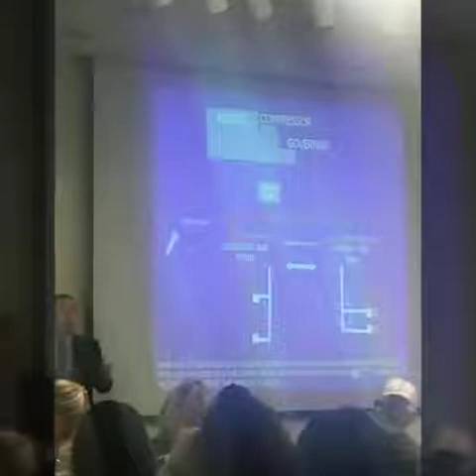No. All right, so when it comes down to it, it's all or nothing here, but this is only applying the rear, right? So if you pull it, the bus is going to come more than likely to a smooth stop, unless you're going really, really slow, unless it's raining. If it rains and you pull it, your wheels are going to lock. Be very careful with using a parking brake ever to slow the vehicle down.

The only reason why I would use the parking brake to slow down is because I don't want my front brakes to brake. And why would I not want my front brakes to brake in an emergency situation? How about I get a flat tire in the front and I'm going 55 miles an hour on a rural road that's just wide enough for the bus, with nothing but dirt and gravel, and a little bit of water on the other side that we use for farming.

So if I step on the brake and I have a flat tire, more than likely when I brake, the bus is going to pull in that direction. So I have to have the intelligence, the know-how, and the understanding of what I'm going to do under this situation. Now, if I brake lightly, nothing's going to happen.

You're going to be able to slow the vehicle down or just come off of the accelerator. Don't even use the brake. But I'm coming to a stop sign. The tire blows. There's a horse crossing right in front of me in about 200 feet. I need to slow down and stop, or at least slow the vehicle down.

How do I brake without affecting the front of the vehicle to the left or to the right? That would be pulling the parking brake, pushing it in. Pulling the parking brake, get some braking power, push it in. Pull the parking brake, push it in. Controlled braking through modulation with the parking brake.

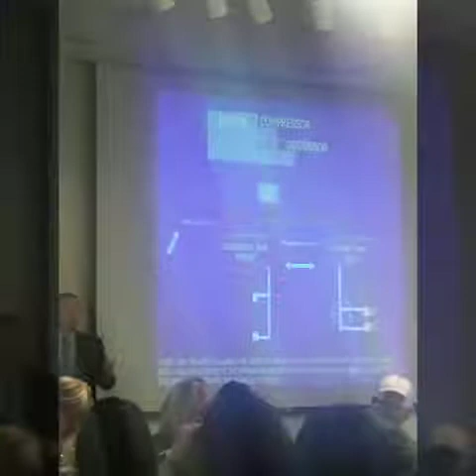Isn't that kind of easy? That's kind of cool, right? Because I don't have to do anything, all right? A monkey can drive the bus, pull the air out, and the bus stops by itself, right? Not to say that anybody here is a monkey, but if you were, you wouldn't have to do anything. It does it by itself. It's really, really easy, all right?

So a separate emergency tank would be used to release the brake and allow the driver to move the vehicle to a safe location. You can still do that with a 121 system, a dual air brake system. Have a separate tank, because once you lose air in the front and the rear tanks, it's going to automatically actuate just like this right here. And what will happen is that you can't move the bus anymore. And you're in the middle of a road, 55 miles an hour, logging trucks, cattle trucks, pig trucks, hay trucks, I don't care. They're coming right behind you and the bus is stuck in the middle of the road.

Nothing you can do unless we cage the springs or somehow patch the air leak, at least have one tank, and then we would be able to push in the parking brake and move the vehicle forward. Well, these systems had a separate tank, separate from the service brake system, which would allow you to push in that valve. Notice that it's not yellow, all right? It's a black valve, or it was a green valve. I've never seen the reds, but I've seen greens and blacks. So you were required to push in the valve, but keep pushing it in. If you did not add force to it, it would automatically stop again.

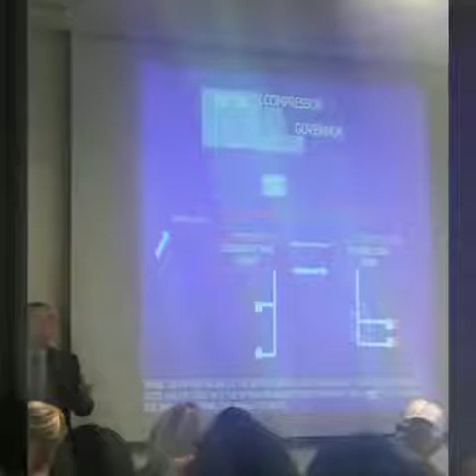All right? So this automatic actuation does not exist on this modulated system. It requires that you use your hand to stop the bus. Bad idea. Because back in those days, there were no training requirements for school bus drivers. You did not have to go through that really boring class. You did not have to get tested by that really mean CHP officer in the back that looks at you funny when you're tested. I don't think he likes me.

He doesn't even know you. He doesn't care what's going on. All he cares is that he sees what he's dreamed of seeing his whole life, and that is a professional school bus driver every single time he tests or she tests. Right? That's all they want. That's it. But no, what's the big deal, man? I mean, it's like, so I missed the cut in and the cut out, right? What's the big deal about that?

What's the big deal about the static test? Who cares if it's 3, 4, 5, 7, 10? Who cares? It doesn't matter, right? What matters? It matters. It's called safety, right? And why would you want to put yourself in a 26,000-pound vehicle without brakes? What is wrong with you? You are suicidal, all right? You're crazy, right? He's not failing you because you don't know what to do. It's because you're crazy.

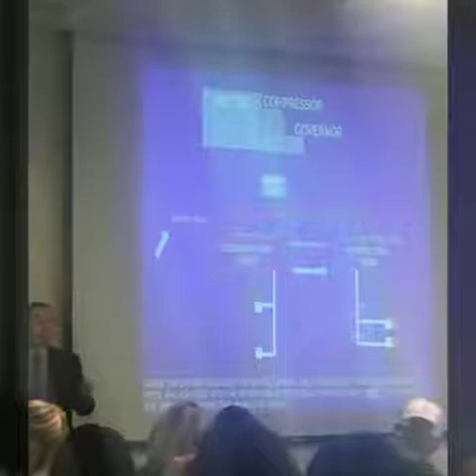All right, so anybody hear of the Martinez accident up in Northern California? Yes. The reason why you have to do all this boring stuff in the morning, you heard it in the morning, you hear it every time you get to the yard, right? It's like if you're Mexican, you know what the zapateado is. Yeah. All right, I like those drivers because I know they can dance, right? I want to dance with you. Why are you doing that? I want to know who would beat up someone for fun or something, because that's exactly what you're doing.

You are beating up a diaphragm, all right? Think about that. If you are pounding on a diaphragm, what do you think can happen? It won't break, right? It's going to leak and it won't break. Why are you laughing? What's so funny? You're pounding on a diaphragm. Eventually, this metal part, it's a hand, right, that's hitting the diaphragm. You're causing friction. And what happens when you cause friction? Eventually, that diaphragm made out of rubber will break. And when it breaks, you're going to leak. And when you leak, that's a bad thing, especially if you don't check your brakes correctly. So do not pound on the diaphragm. It's a bad thing. All right? Make sense? No good.

All right? For those of you that don't have rhythm, I want to party with that driver too. You got rhythm. Yeah, I like it, right? Take your time. Stop being so aggressive. Relax.

There is a specific color. This color is what color? I'm colorblind. What is it? Yellow. Yellow? All right, so it looks gray to me. But yellow means what? Caution. Go faster. Who said that? Yellow means go faster. Stop it. No, it means caution. Hey, slow down. Precautionary speed. Not illegal speed until you violate the basic speed law. Going too fast for the conditions of the road or the weather, all that good stuff.

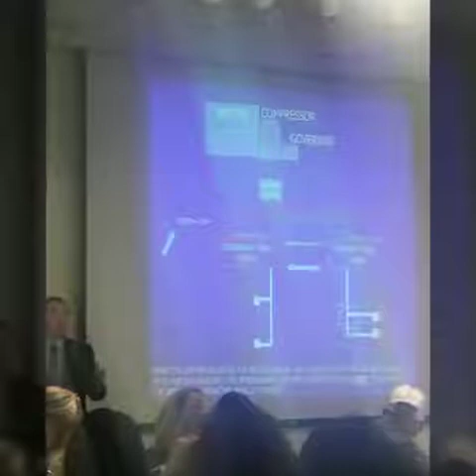When you get a speeding ticket, that's the ticket that you're going to get because it's a catch-all ticket, right? You had an accident. It was raining. You were going too fast. No way. I was going 20 miles an hour. So how'd you just get out of control and hit that car? I don't know, but I was going 20 miles an hour. Good for you. You were going too fast, right? You violated the basic speed law. So it's easy to catch you on that. So obviously, if you have an accident and you're going faster than what's recommended because of the curvature, then more than likely you're going to be at fault by violating that basic speed law. All right? So 20 miles an hour.

The bus hits the rail, mounts the rail, rides the rail, and then succumbs to the centrifugal force, ends up falling down on its roof. And when it falls on its roof, I want you to think about that bus. It was a very old bus. It had low back seats. Just like this right here, what you're sitting on is a low back seat, okay?

I want you to think about the high school kids that were sitting in that seat. The roof is on the top portion of the low back seat. So you want to know why some of these kids passed away with this accident? It was because the roof caved in, and it caved into the seat, and the only portion where the kids were actually safe or had a safe space was between the seat and the floor. All right, very small area.

You know what high school kids look like today, right? I'm sure they were pretty similar back in those days, although there weren't that many McDonald's back then, so I don't know. But I think we've kept our sizes pretty equal our whole time. Although I heard a story this week that our kids are taller, skinnier, but less strong for some reason. And it might be because of Fortnite. You know what Fortnite is? Well, there's a lot of people laughing in here, so you do know what Fortnite is. Yeah. Your fingers are bigger because they need to get to the buttons, right? So I don't know. It's weird. We're supposed to have, in 20 years, a bigger head, bigger eyes, and we're going to turn green or something. That's what they were talking about.

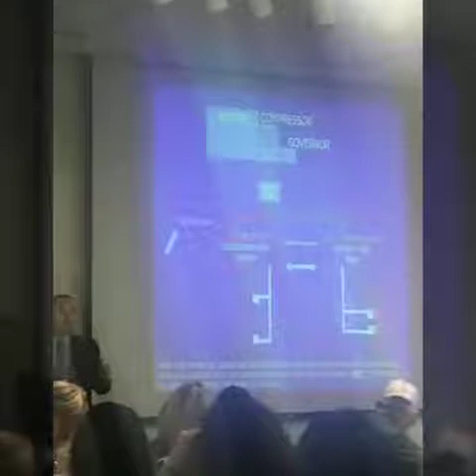But needless to say, what happened here is that back in those days, our buses weren't as strong as they are today. Now our buses have rollover bars. You don't get to see them unless you take a bus apart. But the rollover bars are on top of it. They have very strong steel braces on the side to hold the integrity of the roof.

And hopefully, who knows? If we drop a bus more than 20 to 30 feet, maybe it'll cave in, but it might not cave in completely because we have all those rollover bars as well as braces throughout the whole top of the bus. So it's supposed to bring the bus over to its side if it ever rolls over. That's the design of that bus. We don't want the bus on the roof. We want it on its side. So just to show you what that bus looks like, right now, those kids are actually sitting somewhere in here.

Now, the biggest problem is that the emergency responders have never had this situation happen before, ever, anywhere in history. So, fire department, CHP, local law enforcement, you had everybody there trying to help out, but they couldn't get these kids out. They started making holes all over the bus to find the kids. Anybody know what that used to be, that hole that's right there? They call it a boot, because that was a section where we actually put our luggage and our freight and anything that we were transporting. It was in the back of the bus. So they're making holes everywhere they can to get to the students.

And as you all know, if you've had a class on how time matters when it comes down to saving someone's life, minutes and hours pass, and some of these kids succumb to their injuries because we couldn't get to them fast enough. All right? So all kinds of things were learned from this accident. The first thing, the driver was not required to be trained on the air brake system. The driver was not required to understand or be proficient in the vehicle before they drive the vehicle unsupervised.

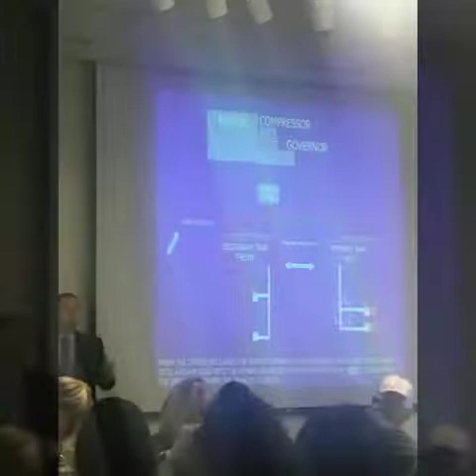So this vehicle had a modulated system. A modulated system, meaning when your service brake goes away, the driver has to use their hand to stop the vehicle, right? Whether it's on the dash, this one happened to be on the steering column, that he had to pull to stop the vehicle. So, it has a leak in the system. The driver is told that the bus leaks oil. So eventually there's going to be a light buzzer that's going to go off. And when it goes off, all you have to do is pull over, go to the boot, and get those gallons of oil that we left in the boot.

Now that's hazardous materials, right? How often do you get to carry those on a school bus? Well, that's right, that's illegal, right? Well, not then. Heck, you can bring fuel, oil. Hey, we can have an oil party for all I care in a school bus. It was completely legal, but because it had such a bad oil leak, guess what? All you have to do is put some oil in it, and then that bus is going to go.

The driver's driving down the roadway, stepping on the brake, there's traffic, all of a sudden you're using too much air and it has a leak, and then the light and buzzer go off, right? When it goes off, what's the driver thinking? Oil leak, right? Pull the bus over to a safe location, put some oil in it, leaves the bus running with kids on the bus. Bus running, kids on the bus, right? No longer using the service brake.

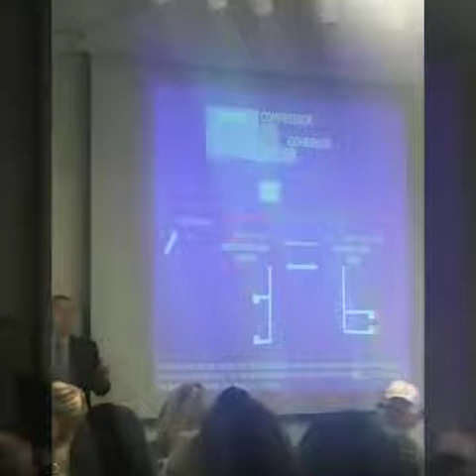So now the leak is not overpowering the braking, so it has time to build up, so the low air warning device no longer stays on as the pressure goes back up. This is a single air system. This is a system that had to have the low air warning device come on no lower than 55, actually between 75 and 55 PSI, if you remember that. So it came on, but if the driver leaves the bus running with the kids on the bus, eventually it's going to go over 75 PSI and no warning device is going to be on anymore.

Puts the oil in, keeps driving, starts getting closer to Martinez, boom! Once again, the low air warning device comes on, but he's thinking it's the low oil pressure warning device. You know what that is? When you turn the key in the on position and you have a buzzer go off, that's exactly what that is. If you turn the key and it doesn't go off, something's wrong with your bus. You have no low oil pressure warning device. It might be very subtle, but pay attention to it.

When you start the bus and you have compression in the engine, right? It's going to go off and the light's going to go off. It's going to be pretty quick, right? But if you lose engine pressure or oil pressure, that warning device is supposed to come on. Sometimes it's the same sound as your low air warning device. So be very careful with that depending on how old your bus is.

So the driver loses the air, doesn't pull over, he's almost there, continues to lose air. And as you start reducing the volume of air in the single system, you start losing the capability. Remember I said 100 PSI? Don't move the bus unless you have 100 PSI. What do you think is going to happen if you're at 50 PSI? You think everything's going to work the way it's supposed to? Probably not, right? You don't have enough air.

Have you ever been pulled over for a DUI and had to blow into that little thing? No way. Why'd you look away? Oh, don't look at me. Oh, that was a long time ago. No, that was my sister. It wasn't me drinking, and it made me blow into the...

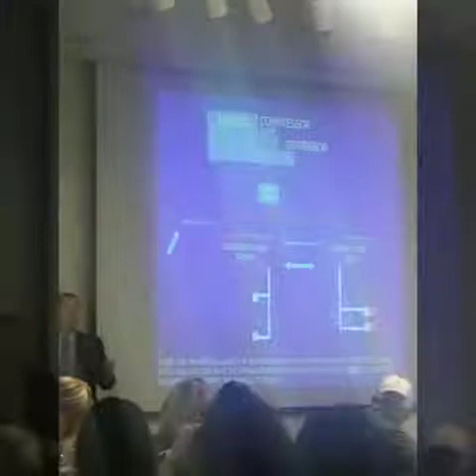No, absolutely not. Now, well, you've gone to do a drug test, and it's an alcohol test too, right? I hate that test. Because blow, keep blowing, keep blowing. Are you kidding me? What do you think my lungs are? I don't have balloons for lungs. I can't blow that long, right? So when it comes down to it, if you don't have enough power or air in the system, you're not going to be able to pass that test. You're not going to be able to move those mechanical parts, right?

So he steps on the brake, the bus does not stop. This is a standard transmission. He's going over about 55 miles an hour. Now, if you've ever driven a bus with a standard transmission, it has a clutch brake. Anybody know what a clutch brake is? Yeah, so it stops a set of gears from moving so that I can put it into gear, especially on an unsynchronized transmission. So this driver could have downshifted this bus to slow the vehicle down. From fifth to fourth, slows the vehicle down, fourth to third, slows the vehicle down, third to second, and now we should be able to traverse this curve without a problem.

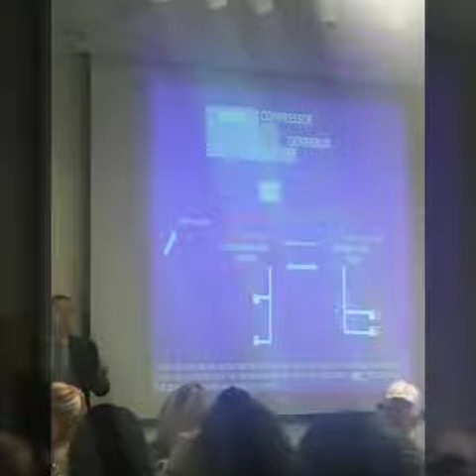He was never trained on double clutching, using the clutch brake, or, in a situation where the bus doesn't stop, using the transmission to slow you down. At least a little bit slower might have given him control of that vehicle. So he steps on the brake. The bus does not stop, steps on the brake again, the bus does not stop, he doesn't understand what's going on. He has a full tank on the emergency stopping system, and all he has to do is pull the lever to stop the bus. Doesn't know, not required to know. Doesn't know, not required to know.

The reason why you're so safe in the state of California is because you are required to know. And you are required to know everything about that bus, power and gradability, brake system, other secondary braking systems like the retarders. You're required to know about the wheelchair lifts and how to tie down. Everything on that bus you must be proficient on before you can drive that vehicle unsupervised out there on the road. Even if you pass the test with CHP, if you're not proficient in the vehicle and how to drive this vehicle, you cannot drive the vehicle alone. Does that make sense? So why does that happen? Because we killed 29 people. Proficiency was required after April 1st, 1977.

SPAB. You ever heard of a SPAB bus? The ones that take you to work, right? When you do an activity trip, the really pretty ones with air conditioning and TVs and really nice fresheners inside.

And they have a bathroom with a massage, right? You hit this button and water flushes upward for some reason. No toilet paper. What do they call it? Bidet or yesterday, something like that. I don't remember what happened yesterday.

But when it comes down to it, SPAB was created. Proficiency was required, Title 13, Section 1229, right? We just heard that in the last class. And last but not least, Federal Motor Vehicle Safety Standard 571-121 was created. That means that you have to have a bus that has a system, a backup system, and an emergency stopping system. So you have a primary system for your rear brakes, a secondary system for your front brakes, and an emergency stopping system in case something happens to one or the other. No matter what happens, what you need to know out of this class is step on the service brake and the bus is going to stop. Got it?

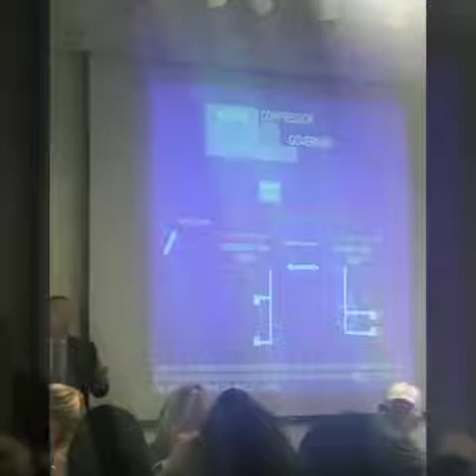That should not be happening with your supply tank. It is not a wet tank. If it is wet, ask your mechanic, do I have an air dryer? If you don't want to ask the mechanic and you want to find out if your bus has an air dryer, wait until the air governor cuts out. And at the end of the air governor cut out, you will hear what? Flatulence. Yes, very good. That is the air dryer exhausting all the gunk and extra stuff out of the system before it sends it somewhere else. So this air dryer is doing that work. If you have an air dryer, you're not going to have a wet tank. Does that make sense?

If you have a wet tank and you have an air dryer, let your mechanic know. Every day at least dump the air out of the supply tank. If you don't do that, you don't know what's going on in your blue system. You got it? If it's leaking, you can see oil, you can see gasoline, you can see coolant in there. You see all those things because things can bleed into your compressor.

Your compressor is hooked up to the engine. 99% of the time it's using the cooling system and the lubrication system, or your oil, to work. So at one point in time, the gaskets go out and they can start bleeding into your air brake system. Where do you find it? In this blue tank right here, the supply tank. Got it? Dump your supply tank. Just air should come out of it. Sometimes a little bit of moisture, but not a whole lot.

If it's gunking and you can see it on the ground, write it up. Something's wrong with my air dryer. Now the mechanic's going to be kind of angry at you because it's like, who do you think you are to tell me that you think it's the air dryer? Well, right. What else would be causing water or gunk getting in there? Obviously, the cartridge inside the air dryer is not doing the work. So it's getting to my tank, right? Bam! What about that? Of course, the mechanic's like, whatever. I'm not going to fix it. I'm just telling you something's wrong with it.

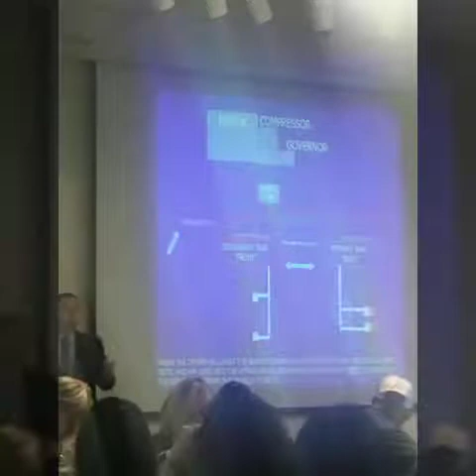All right, the red tank, that's your front axle or your secondary tank. You're going to have the supply tank, the front tank. There's going to be a little valve right there called a safety valve. Anybody know what a safety valve is? What happens to a balloon when you blow into it? Pops, right? What do you think is going to happen to your tank if you don't have a safety valve? It's so it doesn't blow up when your governor doesn't work, because it will fail at one point in time. It will not cut off at no more than 130 psi. It could go all the way up until blow up time. The safety valve is designed so that it will expel the air out of the system at 150 psi.

All right? How do you test it? You've got to stop the governor from working, right? How do you test it? You don't. You see 131 psi, what do you think I'm doing? I'm going to be pulling the bus over to a safe location, doing another brake inspection, calling it in. I need a mechanic. Something's wrong with my air governor. It's cutting out at more than 130 psi, right? 135, 145. Why is it getting that high, right? That's kind of scary. At 150, that valve is supposed to expel.

And it resets. If it does go off one day, for whatever reason, the governor doesn't work, air will exhaust to a safe level, and then it will shut again. So it should work over and over again. And if it doesn't, then the mechanic will change it. Easy fix. All right, same thing with the primary tank. It's the green tank. You're going to have the supply reservoir, so it's supplying to the red and the green. You're going to have a safety valve. You have a drain cock there. You have the low warning device that's set up, more than likely, depending on the type of bus, either in that tank, on the supply tank, or your gauges themselves.

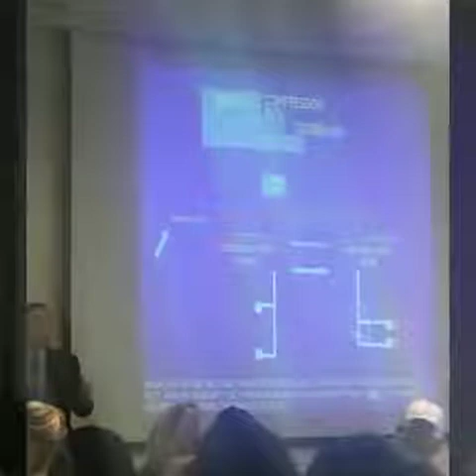Either the valve when I pull the parking brake, or the service brake when I apply it, and a very, very important valve which is called a spring brake control valve. That's exactly what allows that to happen. And of course, your parking brake system has a valve. And what does it say? Parking brake. Does it say emergency stopping system? Emergency brake? Is it red? No.

So don't use it as an emergency brake. Use your service brake. All right, compressors. There's two types of compressors. You're either going to have a gear-driven compressor or a belt-driven compressor. This will be connected to some gears in the engine.

This will be connected to a pulley, and that pulley is connected to like a fan belt, and the fan belt's connected to... isn't that a song? Fan belt connected to... oh, that's another song. But basically, you'll see your compressor, and you'll see a pulley, and you see a valve. That's pretty much how that turns on. The compressor's on at all times when the bus is running. Okay? The compressor's on at all times when the bus is running.

So if your governor fails and it continues to build air, how do you stop the governor? Shut the engine off. Really easy. Turn it off, and it will stop. And you're screaming and yelling, it's gonna blow, it's gonna blow. And it's not gonna blow. You have a safety valve. It's gonna be fine. All right. All right, the governor. What does the governor do?

He passes the child check-mate law, and these things that were supposed to cost $100 now cost $3,000 to install on your bus. Now, not only do I have to do that, but I have to burn calories to go to the back to hit this little button, right? Hit this little button. That's what the governor does, right? No, the governor just signed it. It was the legislature that did that.

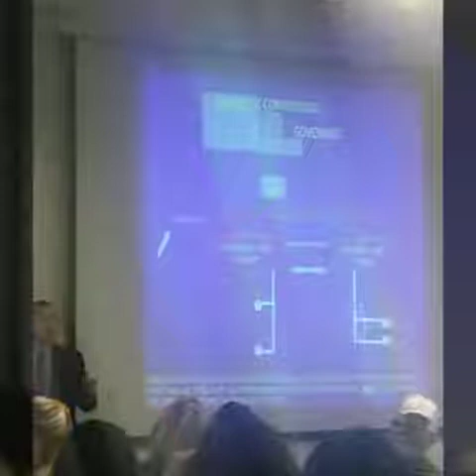So when it comes up to it, it governs something. It turns on, turns off, turns on, turns off. Air conditioning, that has a governor. It's called a thermostat, right? Your cooling system has a thermostat. It's a governor. Cut in, cut out. It turns the fan on or allows water to go from one section of your cooling system to another section so that it maintains a certain temperature to drive the vehicle. Governors are everywhere in your life. It governs or controls the cut in and cut out.

All right? Very simple. It should cut in no lower than 85 psi, and the only way to get to that point is to apply the service brake, all right? Or if you are dumping the air with a valve or push knob, then you can actually touch that knob and dump the air to find out where that governor comes on. It should turn on no lower than 85 psi. 99% of the time, about 100, 102 psi.

Why do you think the governor turns on at 100 psi? Didn't I say that you had to have at least 100 pounds to move the bus? Wouldn't it make sense that a system would know that? Right? So the system's smart. It's like your phone. It knows everything.

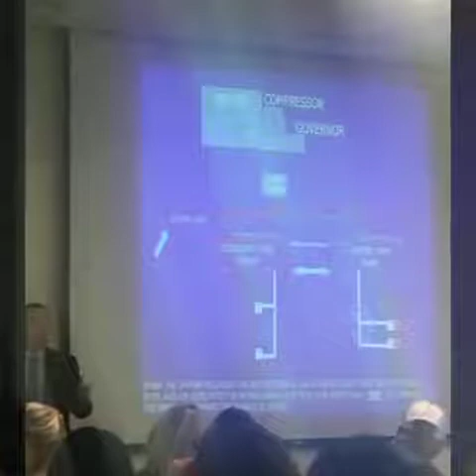Everything that you don't know, you just say, hey, what about this, Google? Bam. Or Cortana, or whatever else. Siri, have you ever said, are you serious? And your iPhone's right next to you? Right? Are you serious? Yes, how can I help you? Shut up, not you. I just can't believe this is happening. It scares the crap out of me at night because the news will say, serious, and she answers, yes, can I help you? I'm like, hey, there's another woman in my bedroom. My wife gets mad at me. It's like, what do you mean? You're talking while you're sleeping. No, I swear. She said, may I help you? And it wasn't you. I get in trouble all the time.

So, governor, it governs, okay? The air dryer is very simple, all right? The air is used from the atmosphere, right? The compressor is using air from the atmosphere, and it is sucking the air from the atmosphere. It's also sucking all the nasty, gunky stuff that's in the air, right? That's killing people, that's giving you cancer, all that good stuff.

All that stuff is going into this air dryer. It is absorbing all that stuff, the moisture and the gunk, so it doesn't go into the brake system, all right? So it removes moisture and contaminants from the entire system. The air dryer's job is to cool, because the air does get warm, because it's a little engine, that compressor's building that air.

It cleans and it dries the air to ensure efficiency in the dual air brake system. Pretty simple. All right? Supply reservoir is in the blue. That is basically taking the air from the blue system, brings it into the center, and it pushes it out to your front and rear tank. All right? So if you're going to drain anything, drain that one. You drain that supply system, it will tell you that something's wrong in the charging system or blue system if there's gunk or liquid coming out of it.

When you come to the rear tank or the front tank, you're going to have a valve called a one-way check valve. Okay, this one-way check valve allows air to go in one direction only. Does that make sense? Have you ever been on a one-way street? What happens if you go the wrong way on a one-way street? You crash, right? Have you ever seen someone getting on the freeway going the wrong way? That's a one-way system, all right? It doesn't work two ways. It only works one way. This is a one-way system.

It allows air to go into the tank, okay? Notice that it has a little spring on the inside. It has a little seal made out of rubber. When you push the air or the governor cuts in, it's pushing the air from the compressor into the system. As soon as the air governor cuts out, the air inside the tank pushes this way as well as the little spring to keep the air in your front and rear tank. Okay? Does that make sense?

How do I know that the one-way check valve is not working? Does anybody know how to check the one-way check valve? Anybody? Okay. Remember I told you that this tank right here supplies the air to the front and the rear, right? Dump the air out of this one. If one gauge moves, and it's the rear gauge, then guess what? Your rear one-way check valve is not working, all right? What happens when your rear one-way check valve doesn't work? Well, air is going to leak out of it, right? You're going to have air leakage.

You'll see it on the static and the applied, but the easiest way to check your one-way check valve is to dump the air out of the supply tank. Any tank moves, front or rear, whichever one moves, the one-way check valve is not working. Make sense? If they both move and only one's bad, not only your one-way check valve is not working, your two-way check valve is not working. All right? Dump the supply, and it will tell you if your check valves are not working.

Is that required for you to check? Not at all. You are not required to check the one-way check valve. You are not required to check the two-way check valve. You are not required by law to check the emergency stopping system. Title 13, Section 1215 states that when you check the air brake system, splitting the tanks are not required. Okay? The only way to check the emergency stopping system is by splitting the tanks. The only way to check the one-way check valve is by dumping the air out of the supply.

Not required. You're not a mechanic. Only the mechanic's required to split the tanks to find out if your system's working. That's what they do on your 45-day, 3,000-mile inspection and anytime they check your brakes. All right? But can you check it just to know? Yep. Dump the supply and it will tell you all kinds of things that you can't check while you're doing your brake inspection. Make sense? So if you can't split the tanks, at least dump the supply, look at your gauges. The front and rear gauges should not move. They should stay put, all right?

Only one exception, and that is if you have a different air dryer, I think it's called an ADS9 or something like that, you're gonna have pressure protection valves. You're not gonna have single check valves. So what it'll do is both of them will dump to 100 PSI, and then they'll stay at 100 PSI. That's it. All right, so if that's what's going on, talk to your mechanic about it. Got it? I think Bluebirds at one point in time had that air dryer.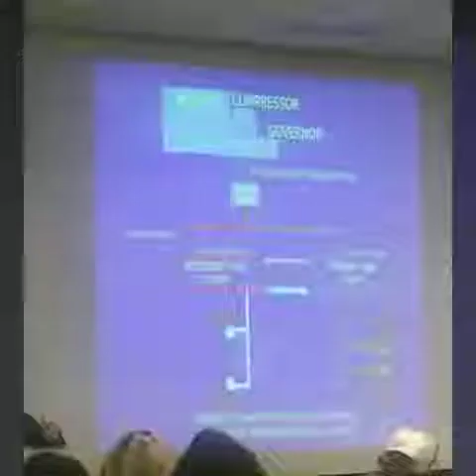Make sense? How do you know it's not working? You press on the brake, it does this, and then it's okay. Well, what happened? Well, your tires are flat. No, that's not it. Bad alignment. No, that's not it, because it doesn't do it all the time. It only does it when I brake. Well, then your relay valve is not allowing those rear brakes to come on first, and it takes away control braking. Make sense? Hopefully you don't do that out on the road.

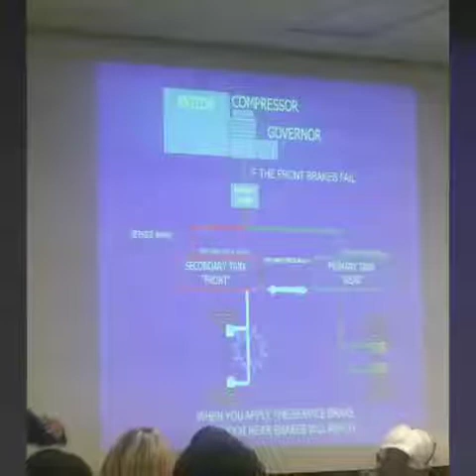Air pressure gauges, it's simple. You're either going to have one with two needles, one green, one red, or you're going to have two, one needle apiece. That tells you that there's two tanks that we're servicing here. Spring brake control valve. The spring brake control valve is the brain of the operation. It is the valve that's going to allow you to use your parking brake when your rear brakes don't work. Does that make sense?

What do you have to do to make it work? Nothing, other than take the air out of the rear tanks by itself, apply the brake, and listen for the sound of the parking brake applying without you applying it. That's all you have to do. Dump the rear brake system, the green. You have to separate, leave the front with air, apply the brake, and it will sound like you're pulling the parking brake. That's your spring brake control valve. If you hear that, you have an emergency stopping system.

You got it? If your rear brakes do not work and only your front brakes work, think about the bicycle. That's exactly what's going to happen. You're going to lose control, and you're not going to have control braking unless that spring brake control valve works if the rear brakes go out. Make sense? Guess what? You're not required to check it. So it's up to you. If your school district doesn't require you to check it, don't worry about it. Trust your mechanic.

Get out of here. My mechanic. Do you know my mechanic? I know your mechanic. They're doing the best that they can. Unfortunately, you are quality control, ladies and gentlemen. It is your life when you're driving the vehicle. If there's anything that we can do, it's give you information so that you're more educated about your emergency stopping system.

Well, guess what? Dump the rear tank, apply the brake. It sounds like I'm pulling the brake without pulling it. Does that make sense? Try it. It's a funny feeling to hear something that you've never heard before, and I hope that you never have to hear it when driving the bus. All right? Again, the spring brake is basically your parking brake. It's in the back of the vehicle, and it's what applies the brake when you are parked, or the emergency stopping system.

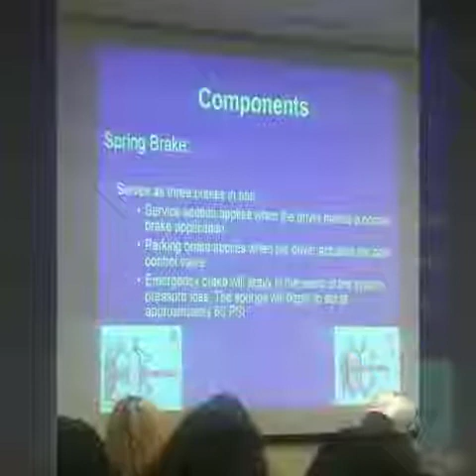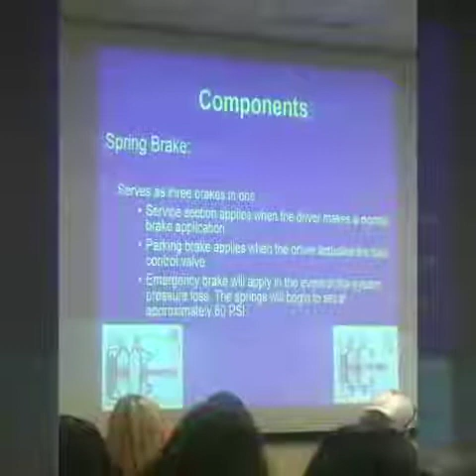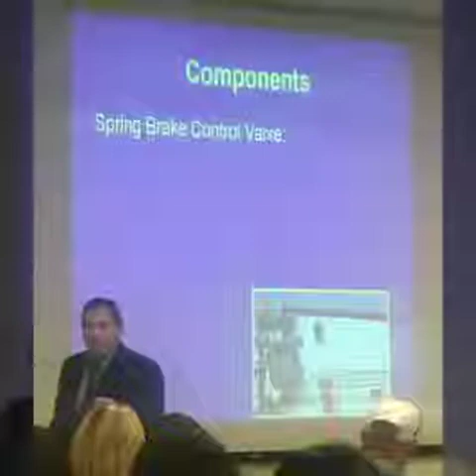It's orange because when you're driving down the roadway, there is air in that canister compressing the spring because you're no longer parked. As you're driving down the roadway, there is air in the only place in that spring brake pod, other than the tanks ready to give you air for your service brake. Does that make sense? Until you pull the parking brake, then this will turn white. You got it?

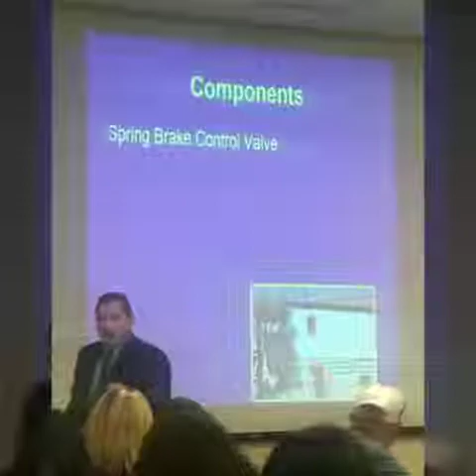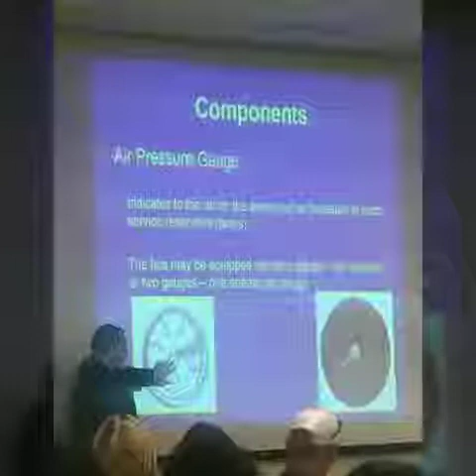So here we go. When I apply the service brake under normal conditions, I'm applying air, and air will go into these pods to apply brakes here, here, and that air stays in the parking brake side. Does that make sense? So you apply the brake, the bus stops. As soon as you release the service brake, what do you hear? Right? Some are funny. You ever heard that before? It sounds like a transformer. When you hear something like that, it's that quick release valve.

It's not releasing the air that fast, and you might want to report that because the air is not coming out fast enough. So when you take off, it's actually still braking while you're driving. All right? So pay attention to that.

So let's just say that for whatever reason, the front brakes fail. If your front brakes fail, what's going to happen? No matter what happens, ladies and gentlemen, use your service brake. Okay? No matter what happens, if you checked your bus correctly, use your service brake. The front is failing. I can hear the air exhaust.

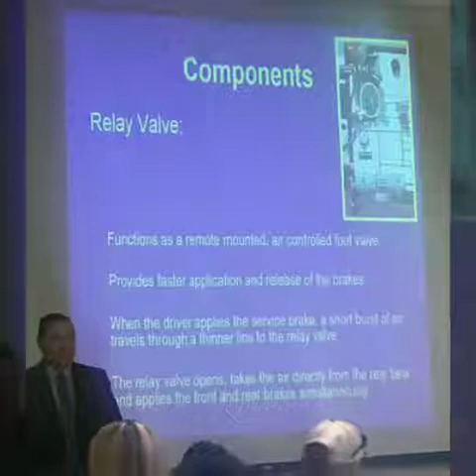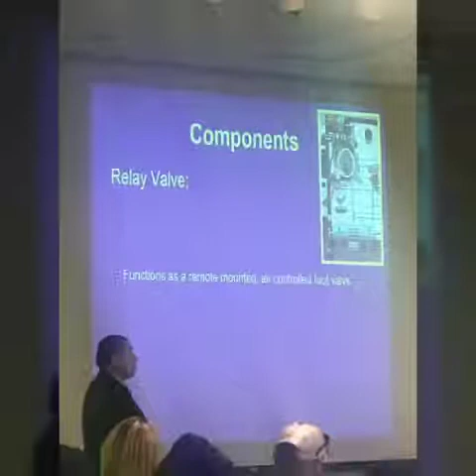As you're driving down the roadway, what's going to happen is that valve, the two-way check valve, is sliding over to the side that's weak. You see that? It's sliding over to the side that's weak, and it's going to seal it. It's going to seal the side that's leaking. The two-way check valve will seal the side that's leaking. If your two-way check valve doesn't work, both the front and the rear will leak.

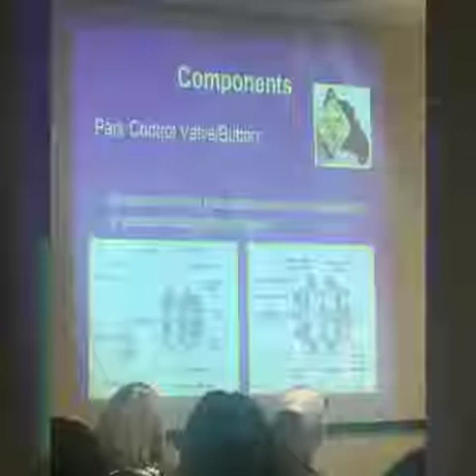You got it? Why is it important that I check my double check valve every morning? Because if one tank goes, the other one will go too, because that one valve that's going to protect the one that's still good is not working, and I didn't check it. All right? So, you step on the service brake. Remember the colors. Where do you have brakes? And you know that because it's green.

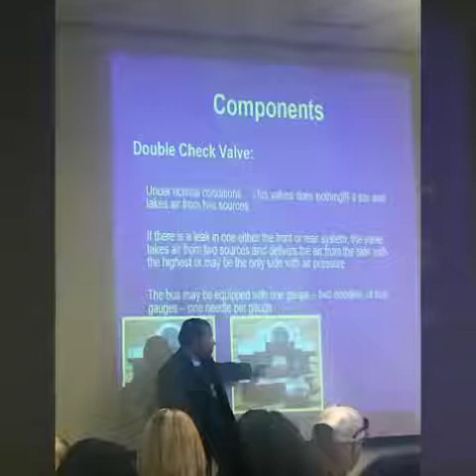Guess what? If you had a bicycle and you only had rear brakes, you think you can stop the bike? Yeah. Can you stop the bus with only rear brakes? Yeah. Is it going to stop faster with only one set of brakes? No. It's going to take a little bit longer, right? Yeah. Can you pull the bus over to a safe location with just rear brakes? Yes. Where do you have brakes? Service brake. No matter what happens, you have brakes in the rear.

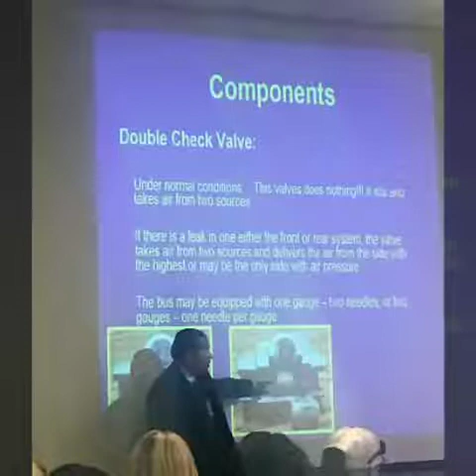So here's the deal, all right? I'm not supposed to tell you this because if CHP hears this, I get in trouble. When they're asking you, what happens when you lose the front brakes? Well, sir, there you go. You're going to crack your fingers, right? The double check valve is going to slide over to the side that's leaking, saving the one side that's got air. So if the front goes out, the double check valve is going to go to the front. Seal it off. I step on the service brake, and I have rear service brakes to stop. You answer that question to the CHP officer, and he might not ask you any more questions.

He's probably like, where in the heck did they hear this? Someone gave him the answers to the test. Please call CDE. There's a problem here.

All right, so no matter what happens, you lose one tank, right? You lose the front. Can you stop with the service brake? As long as the double check valve is working, you're going to have air in one tank. It'll allow you to stop the vehicle. Got it? Make sense? All right, here we go.

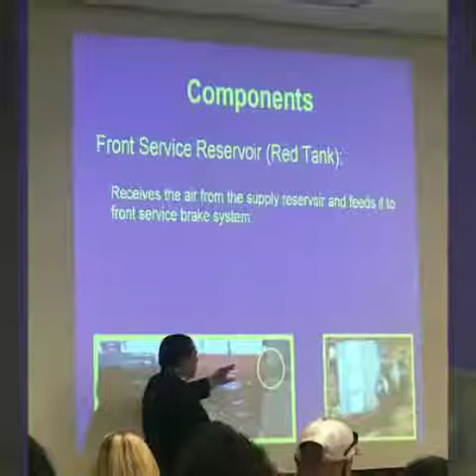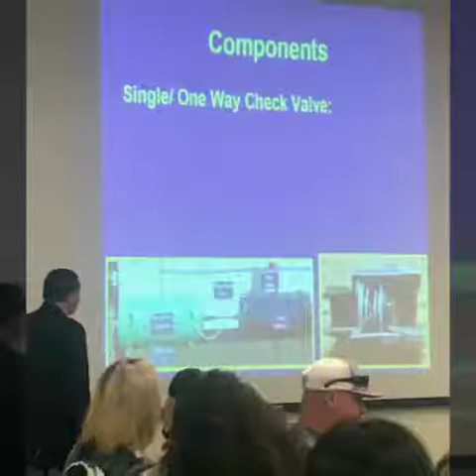What happens if the rear brakes fail? This one is serious, okay? Because rear brakes are control braking. Rear brakes I have to have. So if the rear fail, I must have rear brakes. Do you understand me? The only way I can stop the bus under controlled conditions is with rear brakes. You got it? So here we go.

I lose air in the rear. I still have air in the system. I can continue to use the service brake, but it'll get to a point where it's not going to work. It's going to go to the side that's weak. The double check valve will seal the rear brakes. What's left in the back? The orange, the parking brake system.

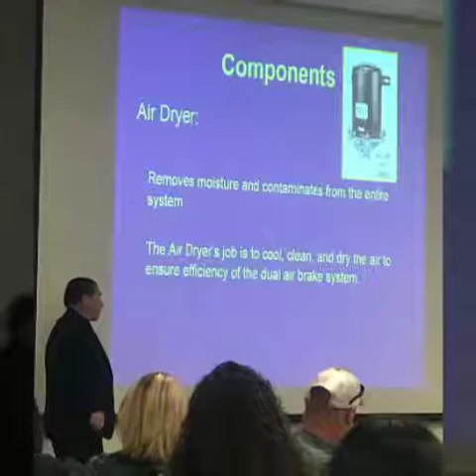Ladies and gentlemen, the parking brake system you're required to use this way, right? But this is a 121 system, one that allows you to modulate the emergency stopping system through the treadle valve or service brake. And how does that happen? The spring brake control valve senses that your green is leaking.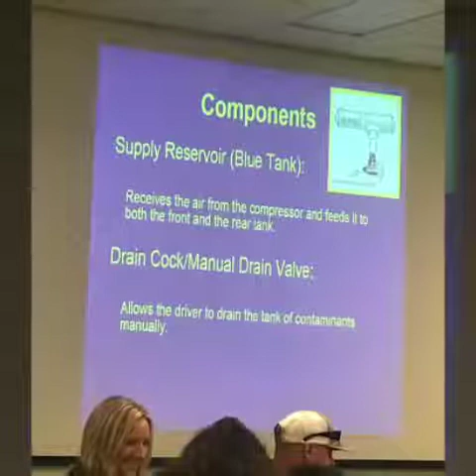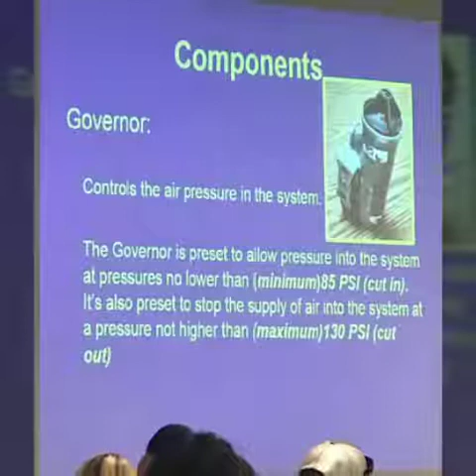Does that make sense? Normal conditions in the front. Emergency conditions in the rear. You now have braking power in the front and in the back of the bus. And this is called your emergency stopping system. The spring brake control valve, the double check valve, the service brakes is what stops the bus under an emergency condition. Does that make sense?

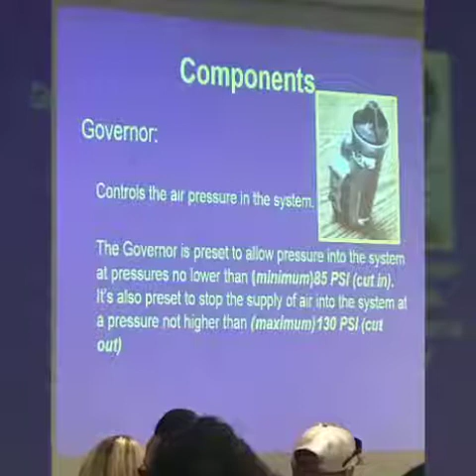So, the modulated operation of the emergency stopping system, stepping on the service brake when the rear brakes go out, spring brake control. Who cares? You don't even have to say spring brake control valve. There's a valve in the back that allows me to use the parking brake system through my service brake to stop the bus. Where do I have brakes? Both in the front and the rear. Control braking. You got it?

Excellent. So if you wanted to check the emergency stopping system, you must dump the air in the front. Check the double check valve. It seals the front and the rear is not leaking. Dump it all the way down to 0. Move the vehicle forward, apply the brake, and you have rear brakes.

Bus stops, right? You want to check the other system, let the air pressure go all the way up to the maximum. At that point in time, you're going to dump the air in the rear. You see only one tank leaking. It should only be the rear tank. The front is staying nice and put. You move the vehicle forward, apply the service brake.

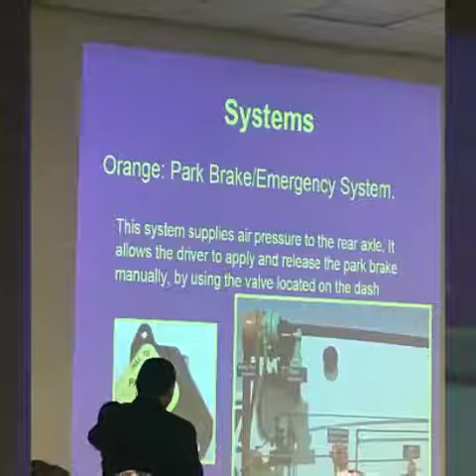It sounds like you're pulling the parking brake when you press on the service brake. If you hear that, the spring brake control valve is dumping the air out of the spring side, applying the brakes through spring force, and front brakes are applied through the air in the tank. Right? Piece of cake. Modulated emergency stopping system through the treadle valve.

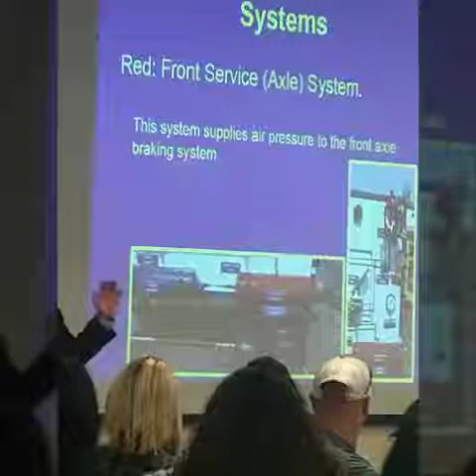Last but not least, this doesn't happen very often, but at one point in time you will lose air in both tanks. Remember we talked about the modulated system and then an automatic actuated system. The only way that the bus will stop by itself is if it loses air in both tanks. Doesn't happen very often. You have to have something catastrophic happen to take both tanks out. That's the reason why you have a 121 system.

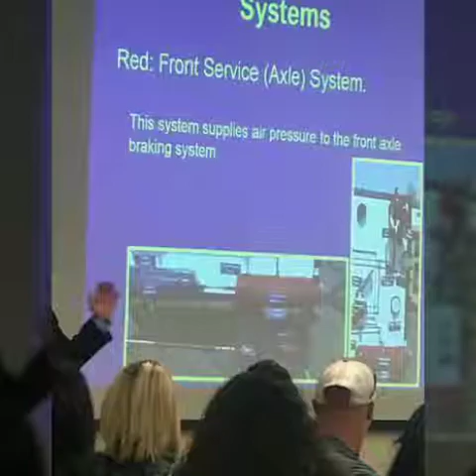2 tanks, right? So if both of them go, you're going to have braking power until the system senses that you no longer have braking power. That means that the bus needs to stop because you can't stop the vehicle safely. At 60 psi, the spring will begin to expand. At one point in time, in the life cycle of the air, it will stop the bus. That's all dependent on how fast you're going. Are you going uphill? Are you going downhill? Who knows? But the bus will stop by itself.

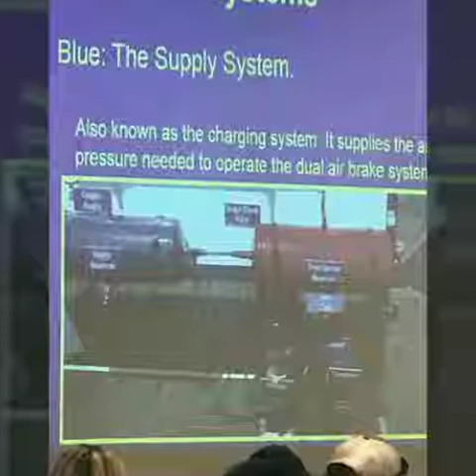All right? Ladies and gentlemen, for those of you that are dumping the air until the spring pops out between 45 and 20, all right? That is a requirement for a tractor, trailer, or a vehicle that is towing other vehicles. Okay? It is not a requirement for a single type vehicle like a school bus. It does not have to pop out. Popping out of that yellow knob is not you knowing where the bus is going to stop. It will stop when the spring force is enough to stop the vehicle.

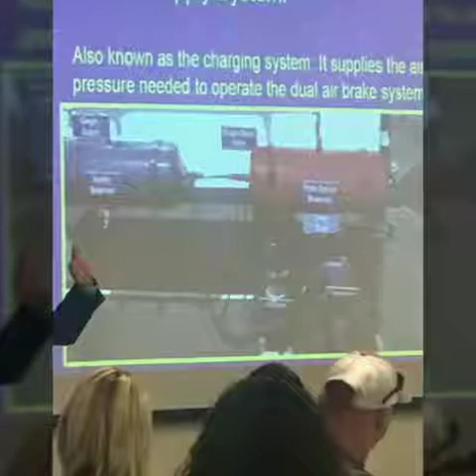Does that make sense? Where does that happen? I don't know. I have no idea. But I guarantee you it's going to be before that spring pops out in that little valve. Does that make sense? So both tanks go out, the bus will stop by itself. Ladies and gentlemen, the only job you have to do is to listen and pull the bus over to a safe location so that you're not stopped on the roadway itself. Does that make sense?

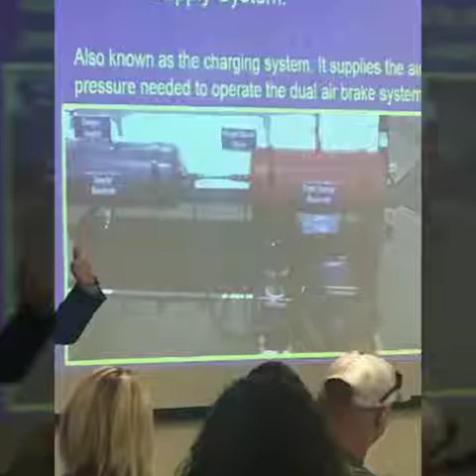Excellent. Does anybody have any questions or concerns about the dual air brake system? Couple of things to remember. No matter what happens in your life, you're going to stop the bus using the service brake. Right? You dump one tank, doesn't matter, you still have a service brake. If both tanks go away, the bus is going to stop by itself, and it has no choice. It has to happen because lack of air is what's going to apply that spring. Question?

It pops back at you, oh. Yeah, you're gonna need an exorcist to come over to you. That is weird. It pops back. Fart, right? Just the bus fart. Yes, every time I pull the parking.